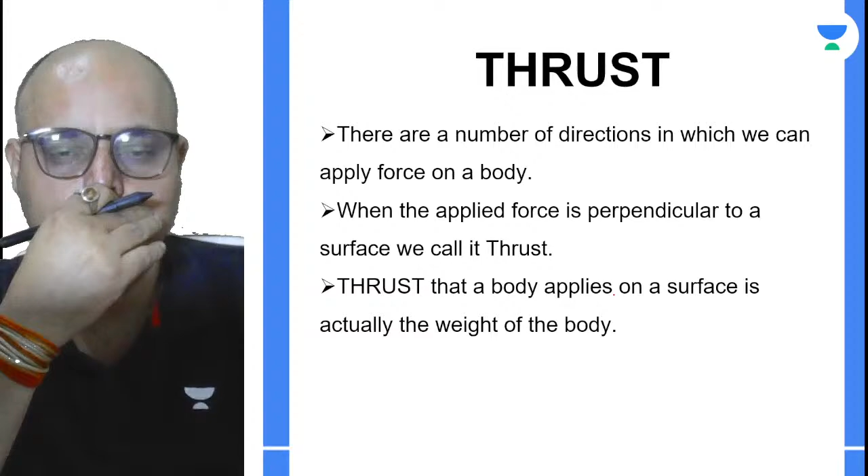So before understanding pressure, we have to understand a very significant term, and we call it thrust. Let us assume that a body is lying on a surface. The mass of the body is m, and a number of forces from different directions are acting on the body.

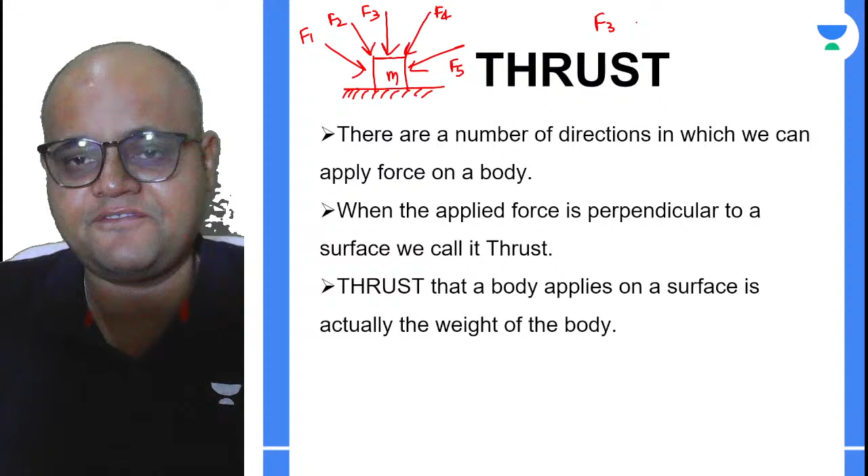So what is thrust? Thrust is the force that acts perpendicularly on the surface. Of all these forces, let me name them - F1, F2, F3. You can clearly see that F3 acts normally or perpendicularly. So this F3 will be your thrust. The perpendicular force is always the thrust. So you have to keep this in mind, that thrust is the perpendicular force that acts on the body.

Now, of all the forces that act on the body, there is one force that we call a reaction force - I'll be telling you about the reaction force later in the session. But technically speaking, we consider that the thrust force is actually the weight of the body. Why? Because the weight of the body also acts normally from the center of mass, and so does the thrust. So technically speaking, in numerical questions, at times they give you mass and ask for thrust.

They give you mass and ask you to find the thrust. So whenever this mass is given, you have to find the weight. Weight W is equal to mg. Now this weight will automatically be your thrust. So keep this in mind. I have a question like this in the session, so I'm sure once we do that question, you will thoroughly understand the concept. And yes, please like the lecture as well if you're watching it.

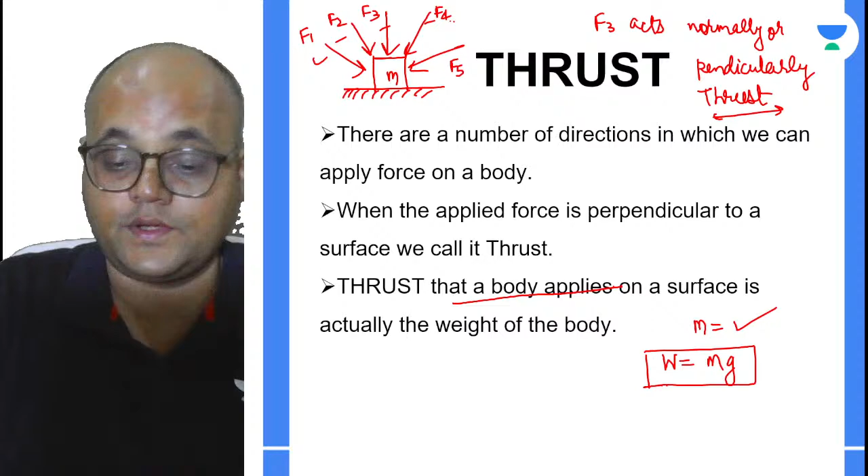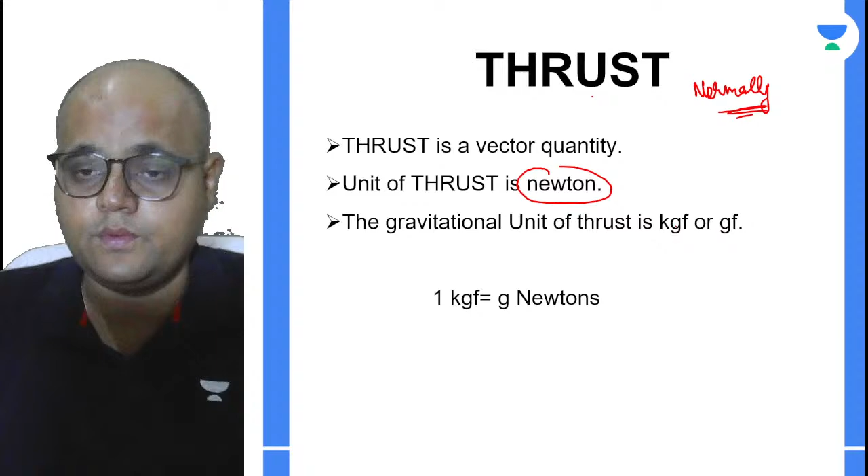So yes, thrust is a vector quantity. Always remember this. Since thrust is nothing but force, the unit will be Newton. But here one more unit we often use, that is kgf or gf. I mean, this is not the kgf movie I mean - it is kilogram force, and it's a gravitational unit of force.

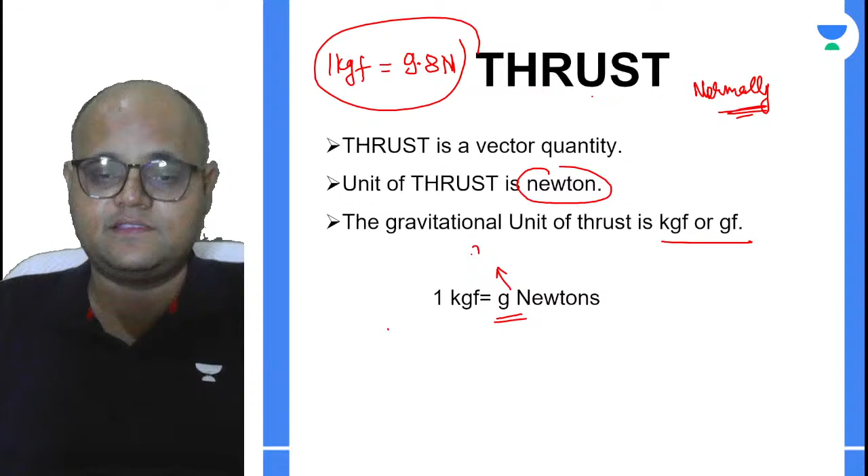So 1 kgf is 9.8 newtons. Normally if the value of g is not given, we take it as 9.8, unless it is mentioned that I need to take 10, I'll be taking 9.8. That is why generically I have written g newtons - whatever value g has, if it is 9.8 it will take 9.8, if it is 10 it will take 10. This is how it goes.

Now if you have seen your book, the chapter basically deals with two important topics - one is thrust and the other is pressure. Now let me give you an example, just imagine a situation.

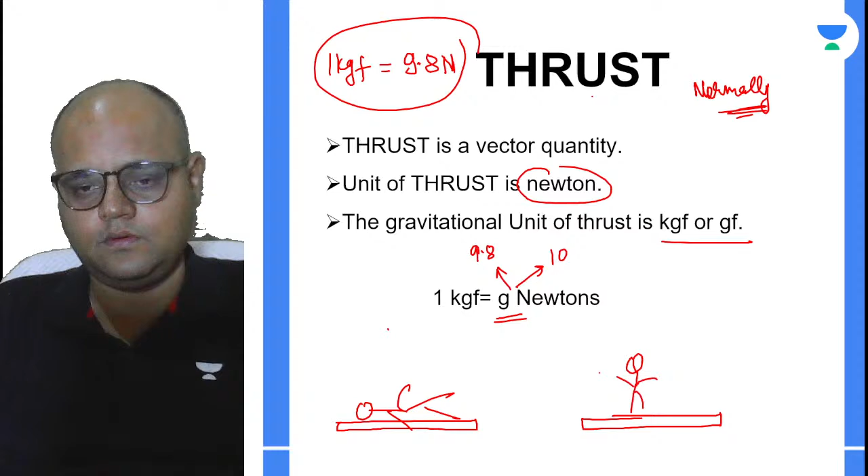This is a pillow, I mean a carpet, and this is again the same carpet or the same pillow. In case one, you are leaning, you're lying on this couch, and in case two, you are standing on the couch. Can anyone tell me in which case the couch will be pressed more? Will it be when you are lying on the couch, or when you are standing on the couch?

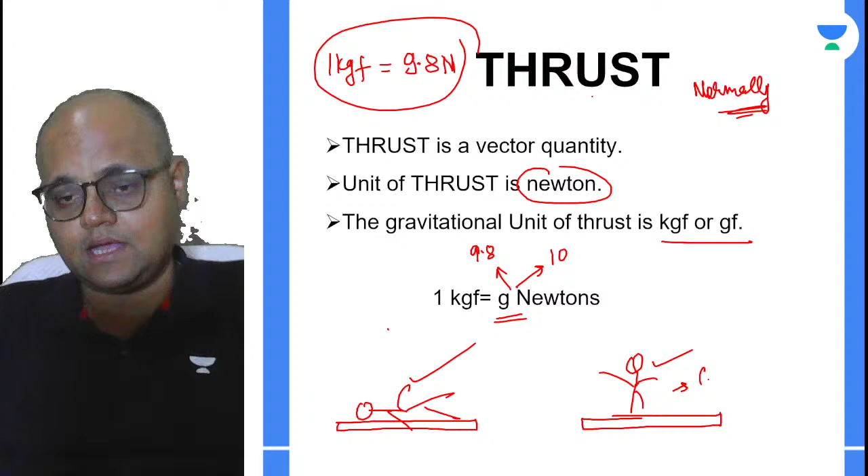I hope you have got my question. Same body, two conditions. Condition 1, the body is lying on the couch. Condition 2, the body is standing on the couch. You will clearly notice that when the body is standing on the couch, it is pressed more.

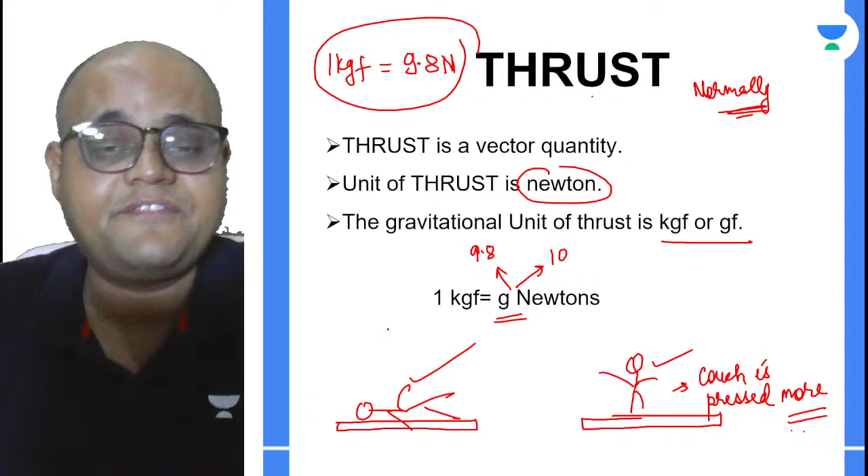So here the force that we were talking about was thrust. So thrust must also have some effect - the force we are talking about here is thrust, so thrust must have some effect. I'm sure you're getting my point.

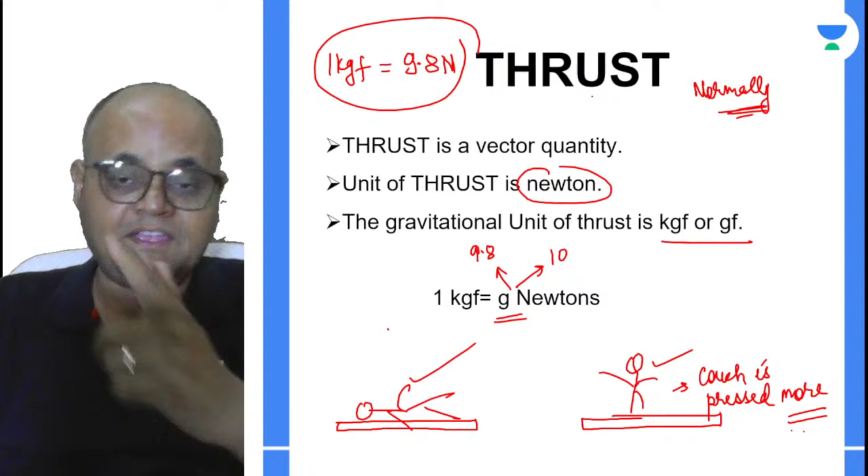Yes, the effect of thrust is basically your pressure. I'm again repeating - the effect of thrust is basically your pressure, right? So if somebody asks you what is pressure, you'll say that pressure is the effect of thrust, and technically speaking, it is the force or thrust acting per unit area - whatever force or thrust acts per unit area, that is the measure of pressure. Now the irony here is pressure is a scalar quantity.

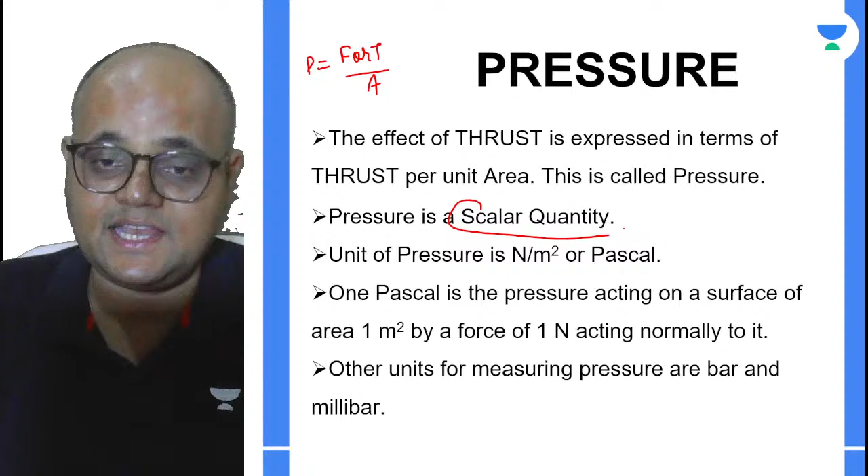Thrust was a vector quantity, but pressure is a scalar quantity, and you have to keep this in mind. If I ask you what should be the unit of pressure, it's very easy - pressure is force upon area. The unit of force is Newton, the unit of area is meter square, so technically Newton per meter square should be the unit of pressure, and indeed this is the case. This Newton per meter square is called Pascal. So the unit of pressure is nothing but Pascal.

Now if we have to define 1 Pascal - whenever you have to define a particular unit, you have to assume some values to be 1. Pressure is equal to force upon area, and we know the unit of pressure is Pascal. So 1 Pascal is the pressure acting on the surface of area 1 meter square, or unit area, by a force of 1 Newton acting normally on it. In other words, when 1 Newton of force normally acts on 1 meter square area, the pressure created is 1 Pascal.

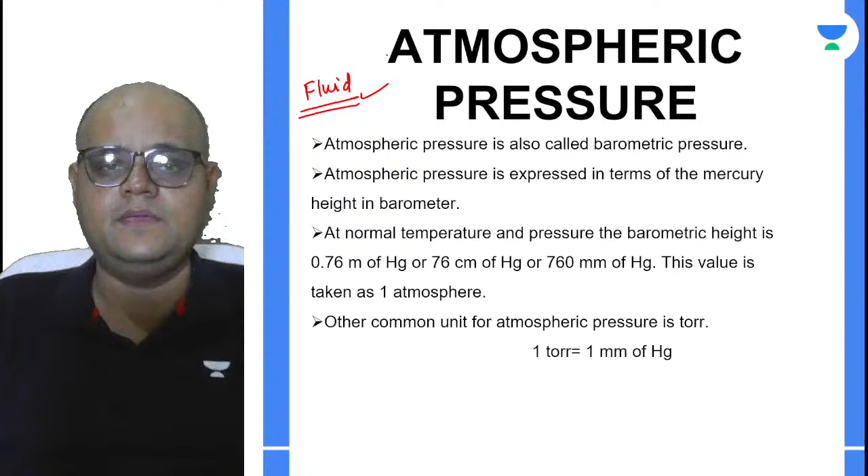Now a very important thing - when we are talking about atmospheric pressure, we encounter a new word called fluid. What is a fluid? Fluid is anything that can flow. I'll be discussing it later, but the logic here is air can also flow, so air is also a fluid. And since air is also a fluid, because of the atmosphere around us, we experience a force, or rather pressure as well, and that particular pressure is called atmospheric pressure. The pressure which we feel because of the presence of the atmosphere, we call atmospheric pressure. You got this logic?

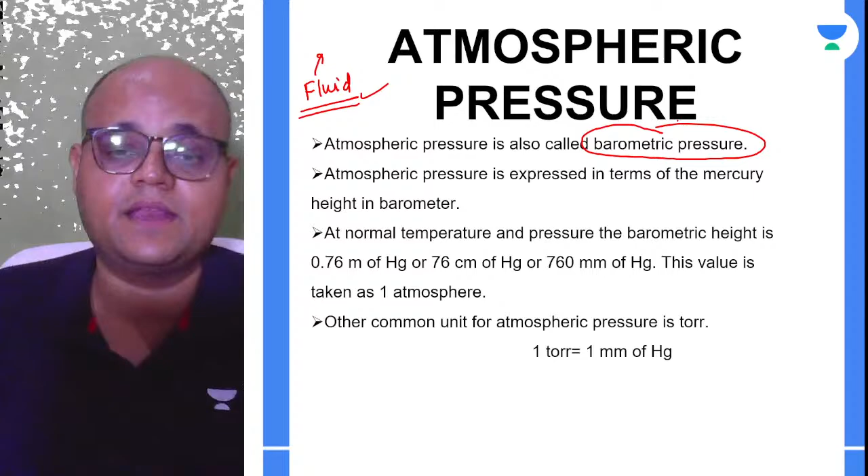That's great. And for atmospheric pressure, we have one more name - we call it barometric pressure. This is the other name for atmospheric pressure. Now this atmospheric pressure, or barometric pressure, we express in terms of the height of the mercury column, and the device used is the barometer.

It measures pressure. Barometer is a device that measures pressure in our case. Now just go through the slide - it's a very important definition which you might get in your examination. Just go through it.

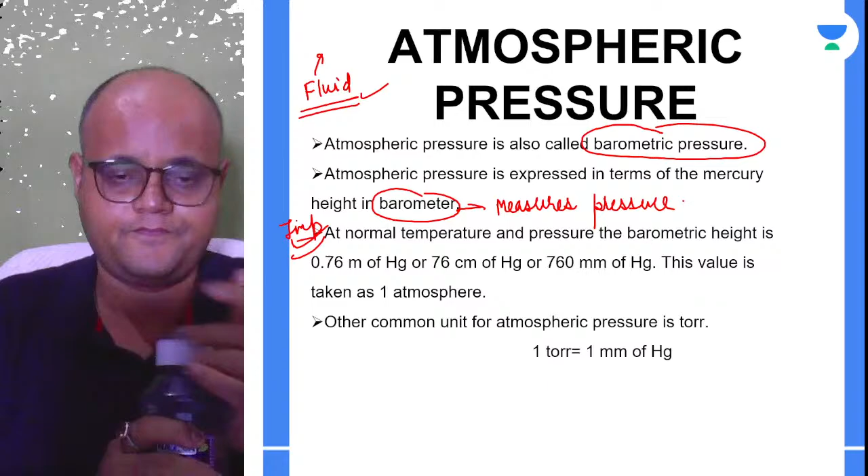Now how will you define barometric pressure, or the atmospheric pressure rather? Normally it is observed that the height is 0.76 m of Hg, or 76 centimeter of Hg, or 760 mm of Hg. Hg is mercury, so the most commonly used is 76 centimeter of Hg. This 76 centimeter signifies height. So in the later part of the session, you will learn that atmospheric pressure depends on height - this height of the mercury column is basically confirmation of that. So atmospheric pressure very much depends on the height.

And this is one more unit that we use for pressure - torr. So now you have got a number of units: Newton per meter square, Pascal, atmospheric pressure, and now torr as well, and ultimately, finally, you had centimeter of Hg, that was very much there. So you might get a question on any of these.

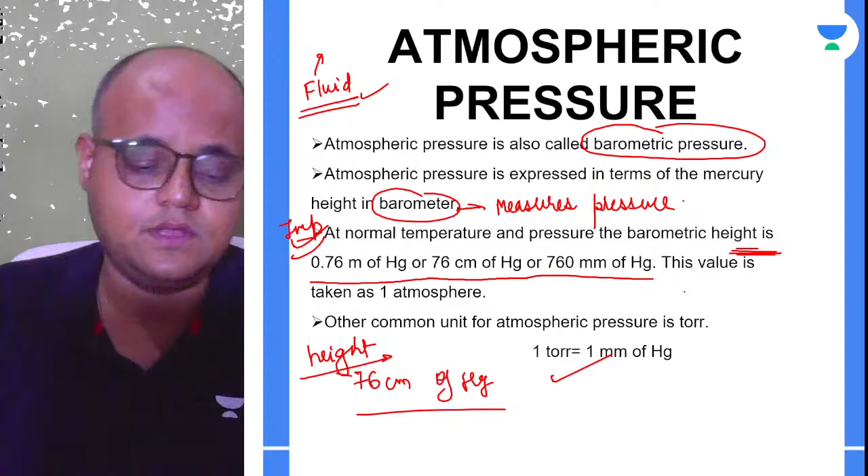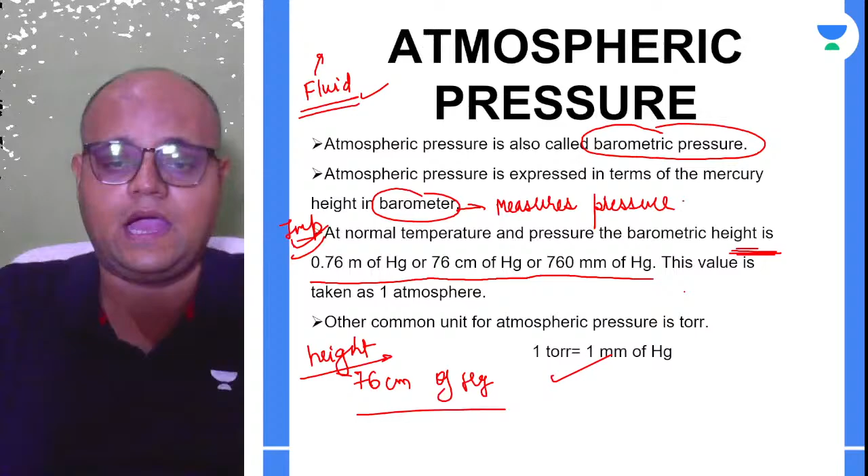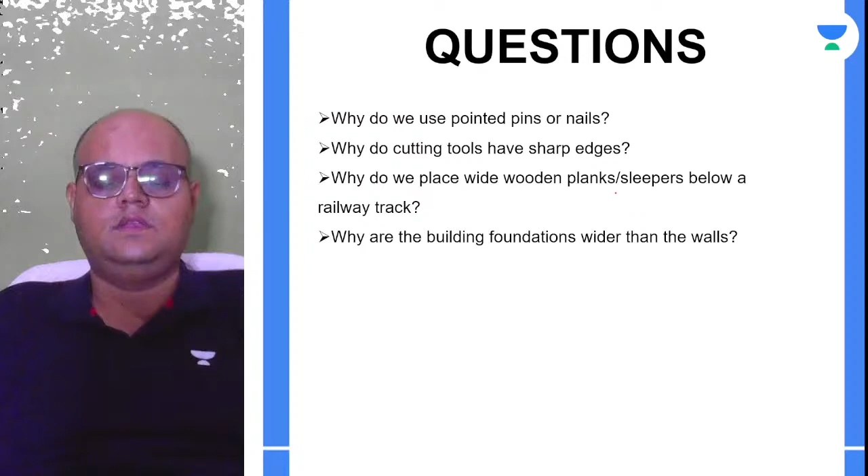Now let's do a few questions. Before doing the question, if I ask you, how can you increase the pressure? Pressure is force upon area - how can you increase the pressure? This is the same logic which will answer many of these questions. Just go through the questions once and then I'll be discussing them each.

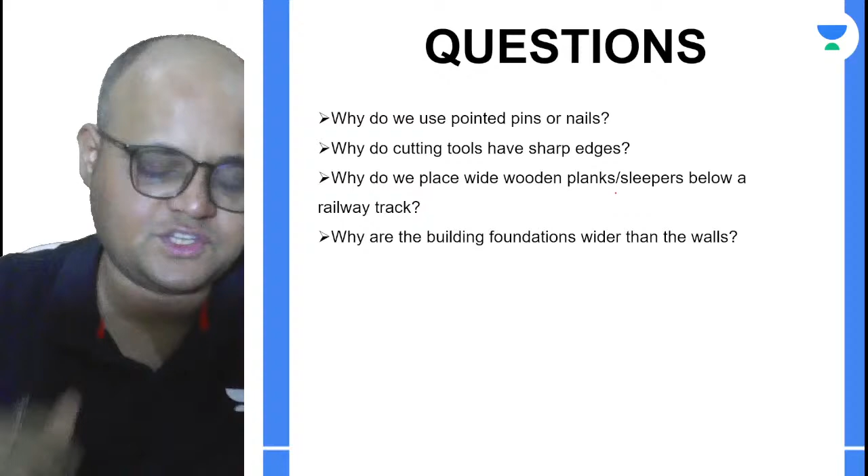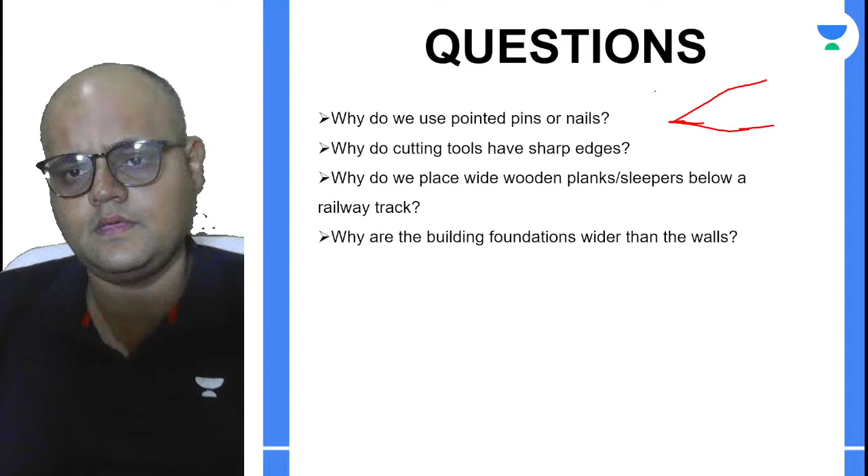See the very first question - why do we use pointed pins or nails? I'm sure all of us preferably use pointed nibs, or if you're using a pencil, we always want it to be sharpened. Reason being, when you sharpen the ends of the pencil and it comes in contact with the surface, the contact area is very less. As soon as it comes in contact with the surface, you can clearly see that the contact area is very less. Now since the contact area is very less, and pressure is equal to force upon area, tell me, if this is very less, what will happen?

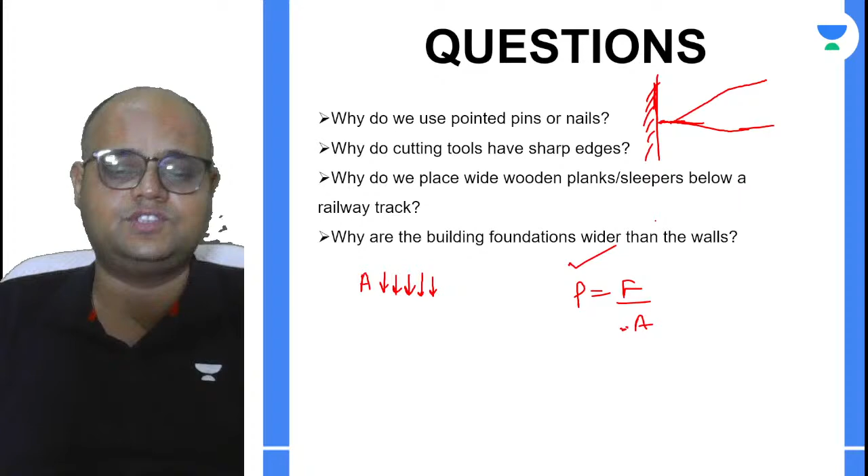Pressure will increase. Yes. So this is the same logic. If the pressure will increase, you will be getting a better impression. Okay, and obviously you'll have to do less effort, right? It would easily manage it, right? The same is the logic for having sharp edges.

A sharp edge will have very less area of contact. The logic here is based on the area of contact of a surface. Greater is the area of contact, smaller is the pressure. Why? Because pressure is proportional to the inverse of area, right? So all these questions, they have the same explanation. The logic here is obviously regarding the pressure, right?

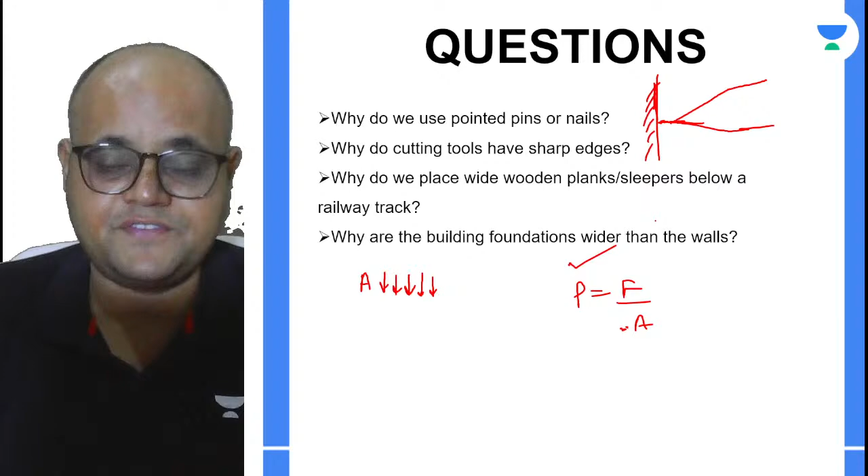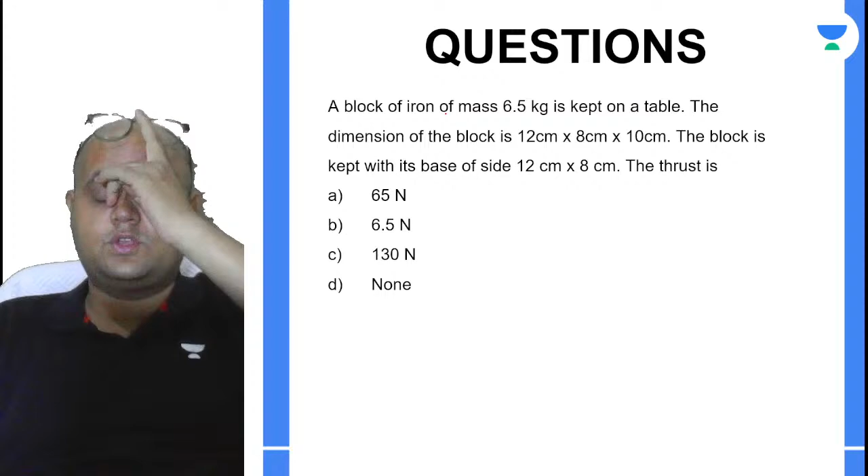Next one. Just try it for 1 minute. I'm giving you 1 minute, whoever is there in the session, and then I'll tell you the logic. It's very easy. If you have understood the theory, you will be 200% confident with the answer. Yes. Just read the question carefully. Chalo.

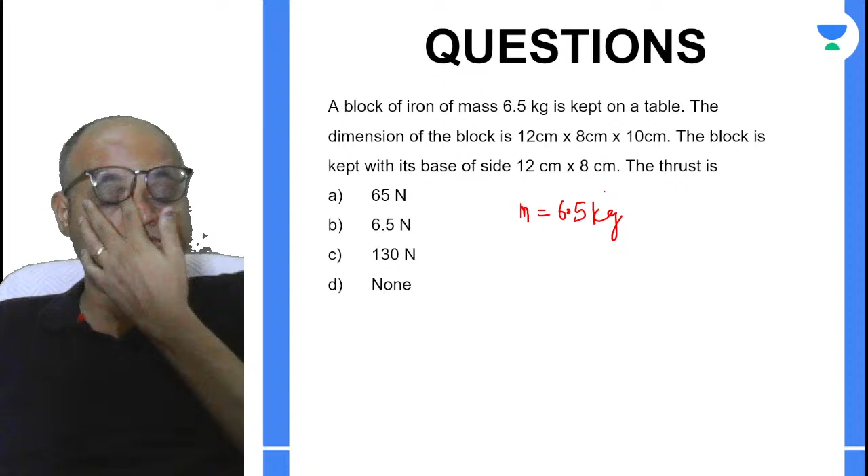Okay, chal. The mass here is given and it is 6.5. Okay. Now see, let me just tell you the dimension. The dimension of the block is 12 into 8 into 10. But trust me, the question is asking the thrust, right? And when we started the session, I've told you thrust is nothing but the weight of the body. I'm sure you are able to recall it. Thrust is nothing but the weight of the body. So now tell me what should be the weight.

You are given mass, and just by looking at the options here, you might guess that g here is 10 meter per second square. Yes? Excuse me. The value here will be 65 newtons. I'm sure you are able to get it, all of you. Okay, fine. Chalo.

Now, this particular part of the session was dealing with the pressure part. Now we'll be dwelling into the upthrust and all. That is equally important. So for understanding the upthrust part, the very first thing that you should know is fluids. I did have a mention about fluid in the first part of the session. Now see,

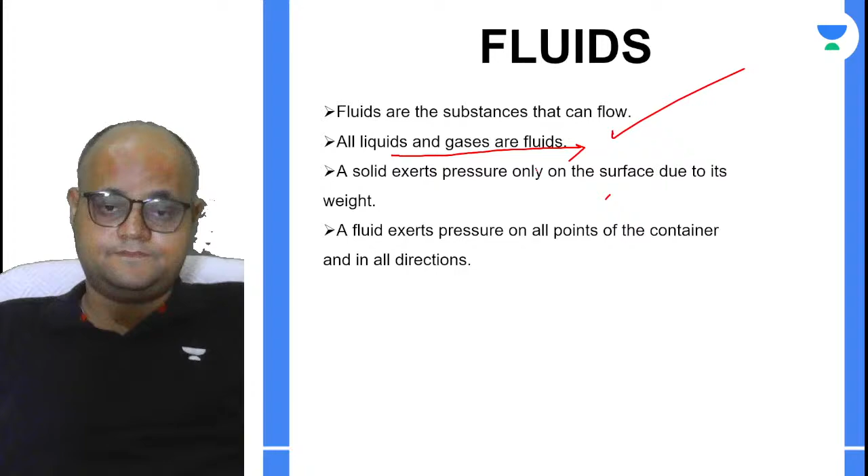any substance that can flow is a fluid. Now all liquids and gases are fluids. Yes, we have an idea on this. Now what about a solid? If you are having a solid lying on a surface, let us assume this is a surface, and a solid is lying on it.

Okay, now what will happen? This solid will exert pressure only on this part, right? The part which is actually in contact with the solid surface will be acted upon by the pressure. This other part is not exerting pressure or force anywhere.

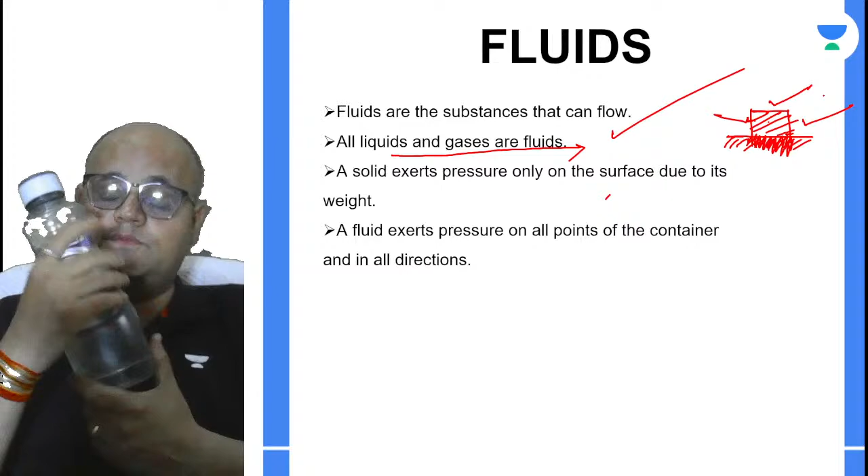Whereas if I say that this water bottle is having water, water is a liquid, a fluid rather, which can flow. Now you can clearly see the water is applying a pressure on all the surfaces, right? All the parts. It is exerting a pressure in all the directions. I'm sure you are able to get it.

The water filled in the bottle will exert a pressure in all the directions. So this is the difference between the pressure exerted by a solid and fluid. And how can you validate this? You can validate this through a very simple setup.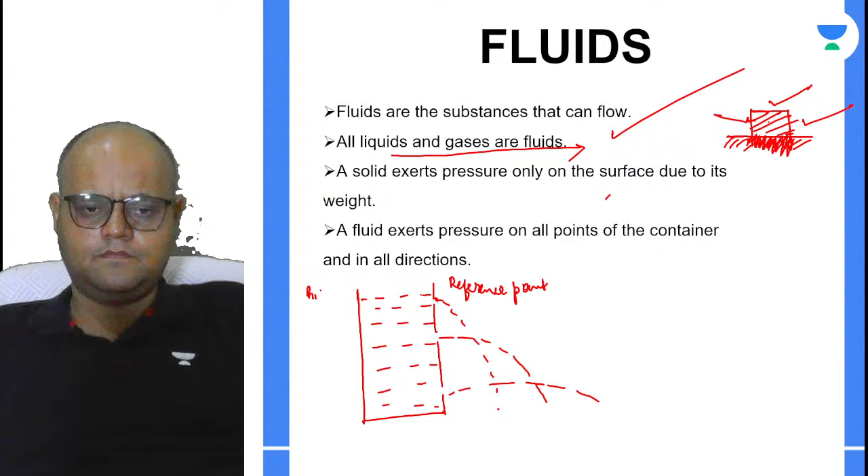This is a container having liquid. If you create a hole, I mean an orifice here, you'll see that the water starts coming out. Okay, this is your reference point. H1, H2, H3, right? So you can clearly see that depending on the variation of the height of the orifice, or the height of the liquid from the free surface, you can imagine the pressure exerted. Okay,

the orifice at the bottom, I mean at a very low height, will send water to the farthest distance. Why? Because the pressure is greater. So in order to understand how much pressure actually acts or is exerted, we have to consider all the factors which affect the pressure at a point. Okay, the very first is the depth of the point below the surface. Now I've just depicted this.

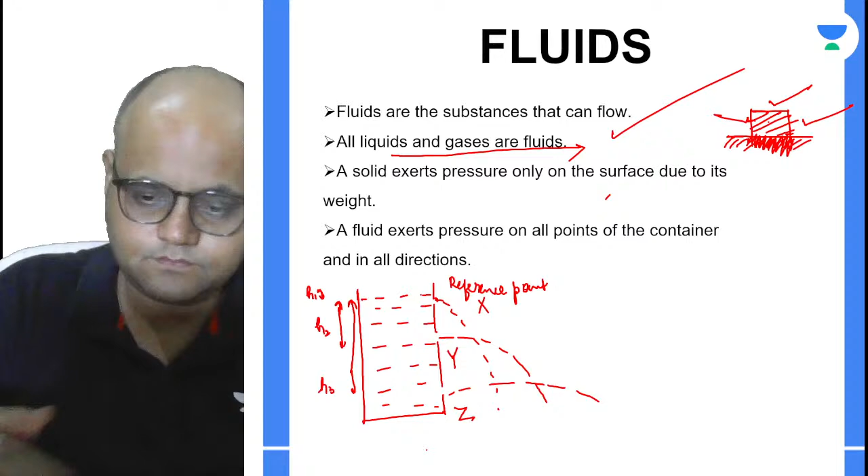Let me call this X, let me call this Y, and let me call this Z. So you can clearly see for Z, the flow is up to the largest distance. So yes, the pressure at Z is greatest. This is how it works. I'm sure you are able to understand how it works. Kind of. Okay, chalo. Now let's see the different factors which affect the pressure at a point.

The very first point I've cleared, the depth part. The second is the density. Now, how does the density affect?

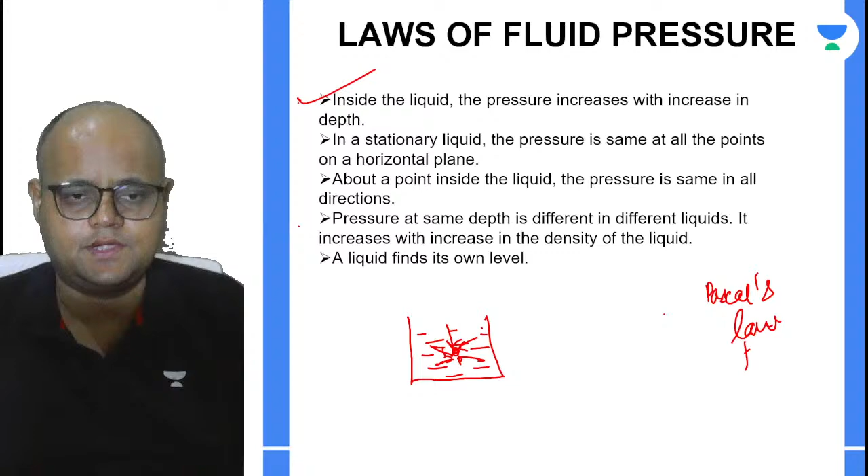The point says pressure at the same depth is different in different liquids. मतलब क्या कह रहा है, the point that needs to be conveyed here is, you are having water, you are having kerosene, you are having say oil or maybe any other liquid, and you are dropping the same body in all these 3-4 liquids. Okay, now the pressure will be different in different liquids.

Okay, now why is actually the pressure different? Because if you have changed the liquid in which you are putting the object, the density of the liquid is also different, right? Water, kerosene, any 2-3 liquids, they cannot have the same density. Yes, and I've already told you that density is an important parameter. So yes, density does affect it.

Now I've missed one of this, acceleration due to gravity. So that is g, which is very much present there. Actually, if I combine all these things, the pressure becomes h rho g. You have to learn this and remember it. I'm just telling you.

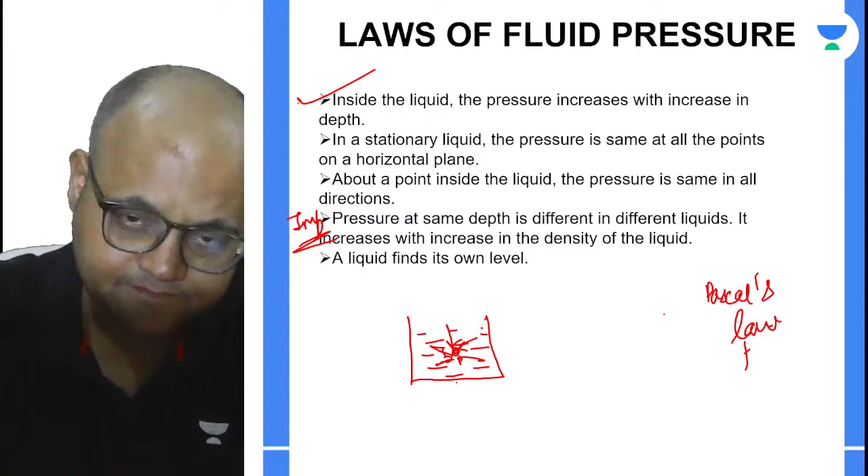Okay, h is the height of the water column. Now this might be a new term for many of you. We'll be calling it rho. Rho, I mean crying wala rona, rho, and it will be density. Okay, and g, I'm sure you know, that is acceleration due to gravity. Okay,

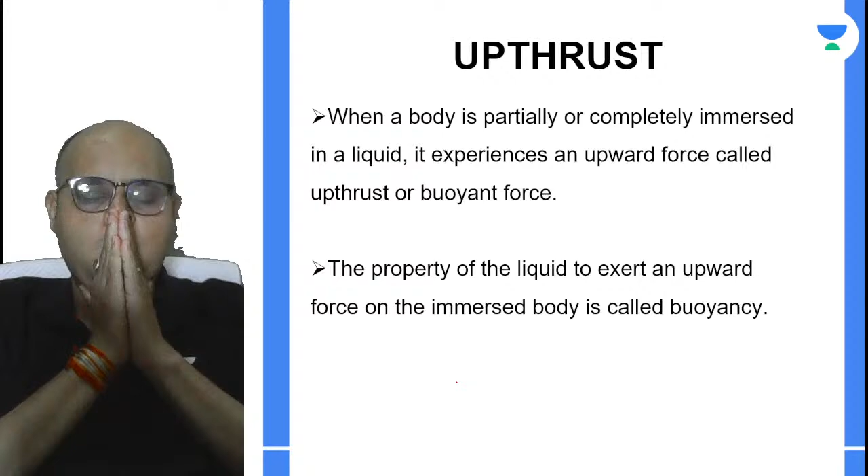Just go through this upthrust. Very, very easy. I'm sure you have noticed that whenever you immerse a body in a liquid, it experiences a force. Yes? Yes, it is clear. Now the question is, what is this force and what is this property of the liquid?

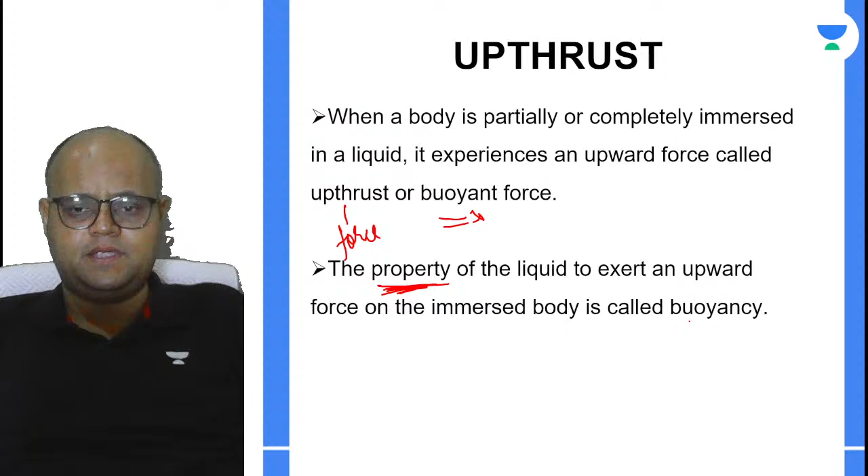See, the force is called upthrust or buoyant force, and the property, okay, I've written it. The property is called buoyancy. So please don't confuse buoyancy and buoyant force. Buoyancy is the property, okay, right? Inherent property, which normally we have to calculate, right?

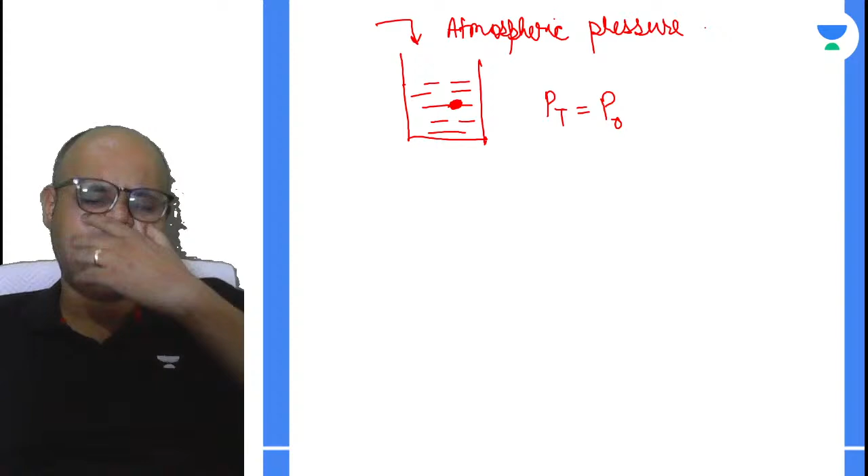So what will happen if I say that you have to find the pressure at this point? So total pressure will be atmospheric pressure P naught. Every educator has a different symbol for it, but normally you can call it P naught. Okay, plus pressure at this point. Let us assume that this point was at a depth of h. So pressure here is rho

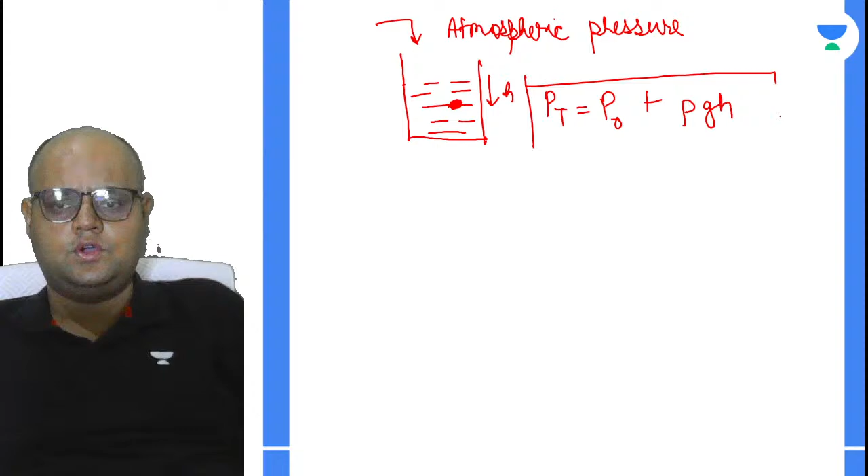gh. Okay, so always remember, when you have to find the total pressure, you have to add the atmospheric pressure, right? Make a note of it. Unless it is mentioned, okay, ध्यान रखोगे. If it is mentioned कि you don't have to add atmospheric pressure, don't add it. Otherwise you should add it. Okay, always keep this in mind.

These are very small points which sometimes make your numericals very difficult, which I don't want to happen with my learners. Is it clear, beta, all of you? Yes.

Okay, so now if you're having a book, you can clearly see that there are certain applications as well, but rather than dwelling on the application part, I would rather love to help you with the derivation part कि ये आया कहाँ से. So if you are able to decode the logic behind it, it will be a cake walk for you. Otherwise you will be having a tough time doing these questions. Okay, chalo, let's do it, and then we will get back to the theoretical slides. Okay, just let me tell you the concept behind it.

This is a vessel. Vessel is filled with water. आप water मान सकते हो. And what we have done is, we have considered an imaginary surface now. See, these are 2 points. One is the point A, the other one is the point B. The height of the water column is h.

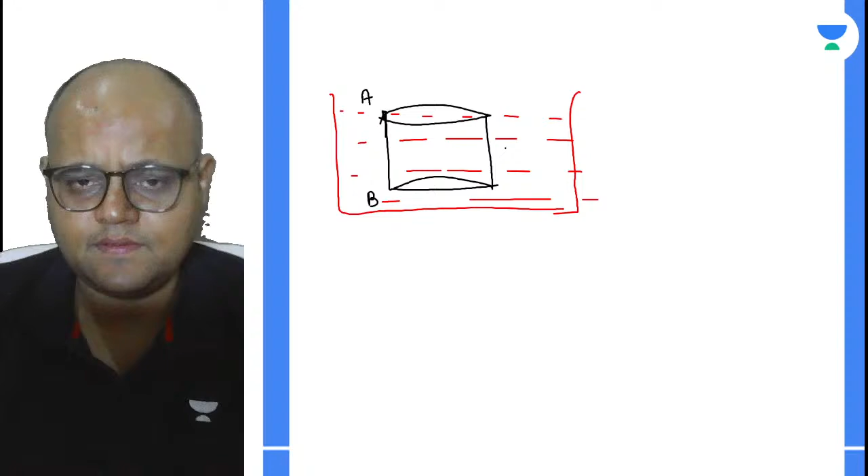Is it clear to all the learners who are watching this? Okay, fine. Now see what can happen. मुझे एक बात बताओ. I have told you that the pressure depends on the height, right? So tell me, PA is greater than PB, or PB is greater than PA, or PA is equal to PB. Which one should be the correct one?

Which is the correct part? See, the height of B from the free surface. Many of these students start taking the height from here. No, height from the free surface. So height for point B is greater. So pressure at B will be greater.

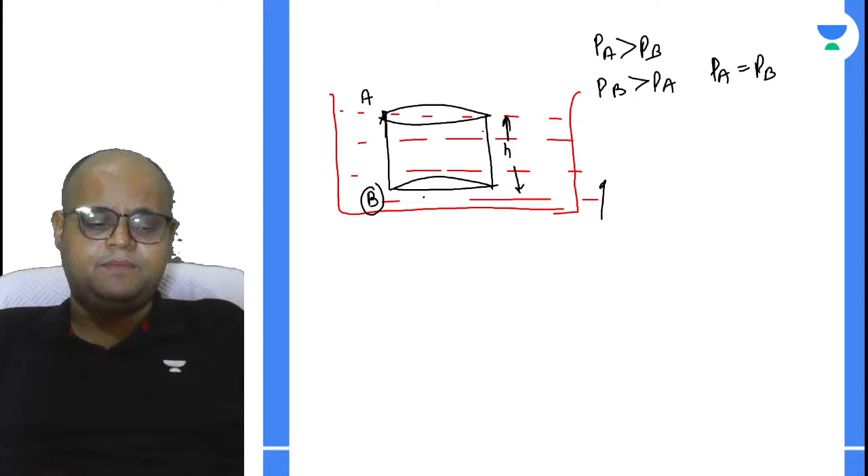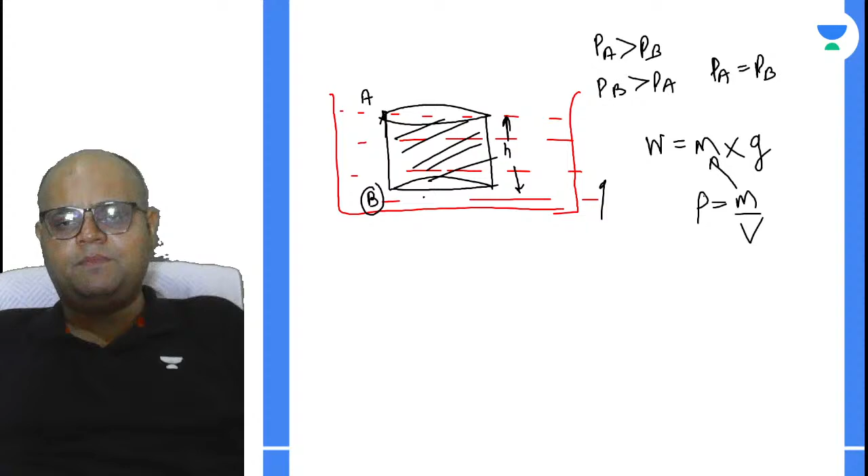See, the weight of the water is m into g. Weights are always mass into acceleration. Now we know that density is equal to mass by volume. Yes sir, we know this. I'm sure all of you know this. Now I can replace m here. In place of m I can write rho into v into g.

Now what is volume? We all know that volume can be written as area into length. So weight can be written as area into length into g into rho. Rho और g तो थे ही, आपने area into length और add कर दिया. Is it clear? Now this weight is nothing but thrust. We have just studied it in the previous class. The weight is nothing but the thrust.

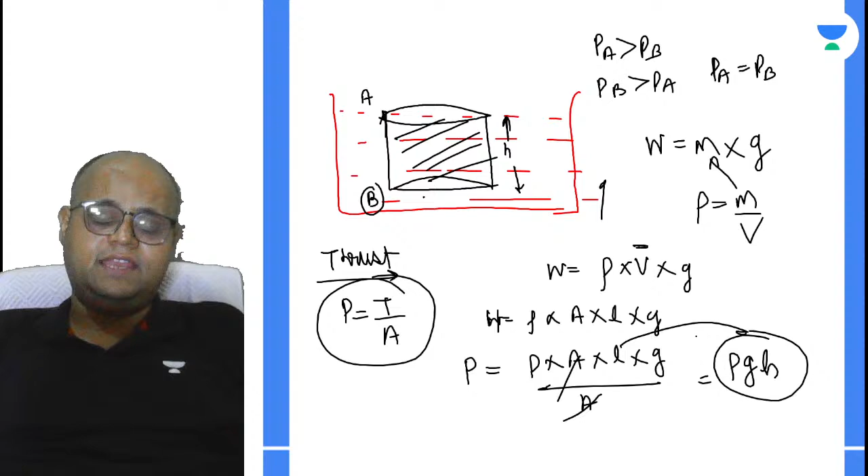And what is pressure? Pressure is thrust per unit area. So what is pressure? Thrust is rho into A into L into g, divided by A, so A gets cancelled. तो rho g L है, L length ही तो है, I can take it h, right? In some cases it can be taken h. So I'm sure you have got how this upthrust comes and where it came from, got the logic clear.

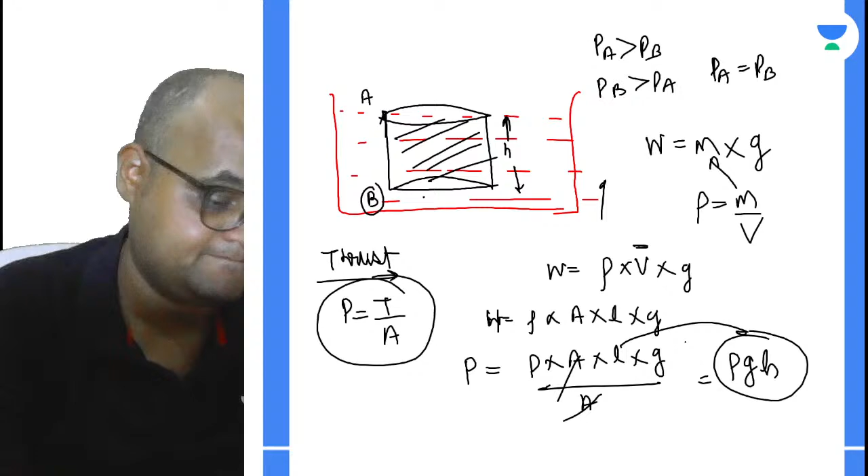Just give me a moment. Okay, now you can just go through these slides. I'm sure now you have understood this. Just take 1 or 2 minutes and go through the slides.

Next one, this one. Just go through this. Right, and this is a very, very relevant example. We are moving in air and air is a fluid, so yes, thrust is there.

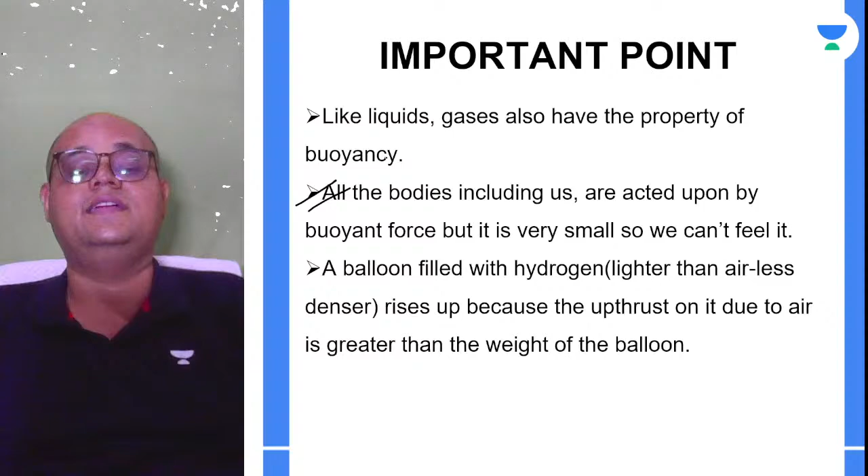Just look at this example. This is a better replication, a better measure for this. Density plays a very important role, right? You have filled a balloon with hydrogen, which is obviously less dense than air, so it does rise up. देखो मैंने क्या बोला था, when the density of the substance is less, it never drowns, it never moves down, it ideally floats on it.

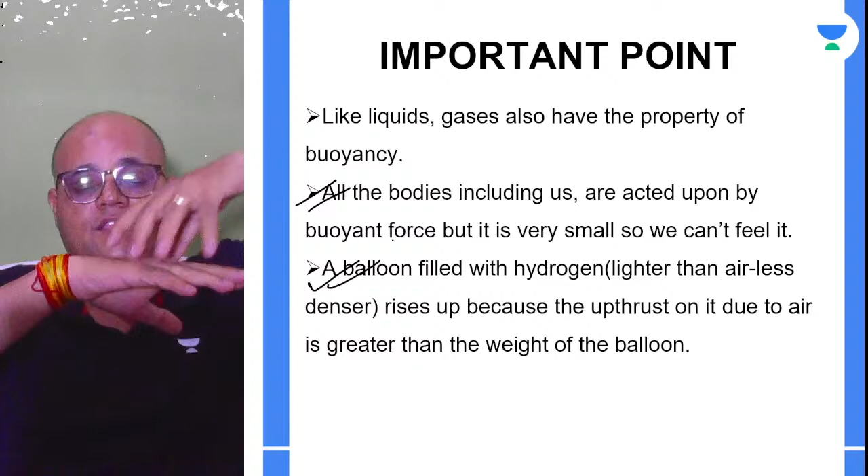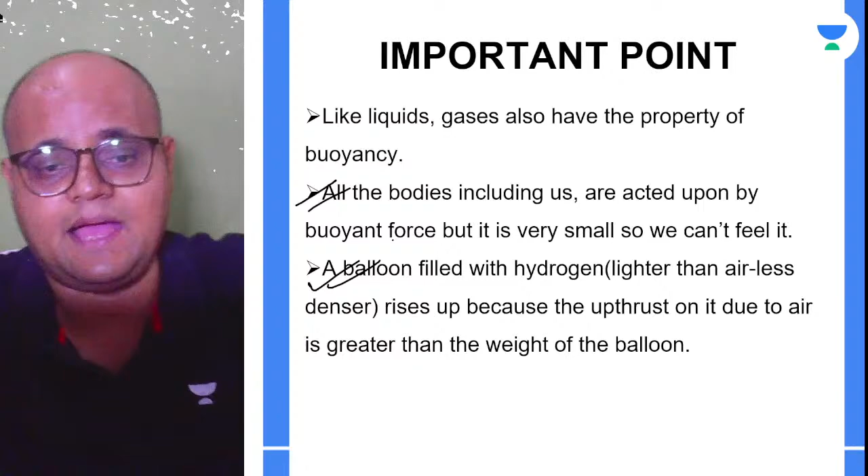If we are considering air as a fluid, what will happen? Air is a fluid, right? And you have a balloon which is filled with a gas whose density is less than air. So obviously, because of the difference in the density, the balloon will rise up. These are very practical examples, guys.

A few very important characteristics which come in 1 or 2 marks questions. They are very relevant to the chapter. Just go through them. I'm sure you'll be able to understand it.